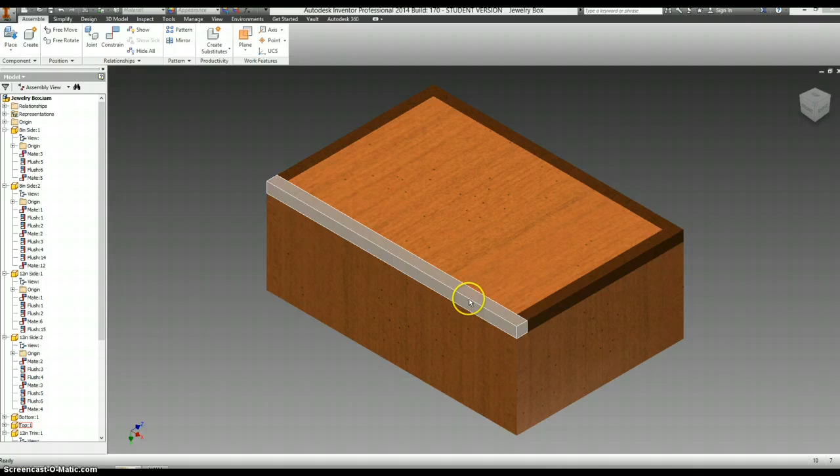So where we last left off, we just made the sides, the bottom, the top, the trim, and we assembled it all together onto your box. Now, with the physical project, this would be the point where we go in and reinforce the sides of this with dowel rods. So on here, we're going to double click one of your sides, and that'll make it so you can edit the piece.

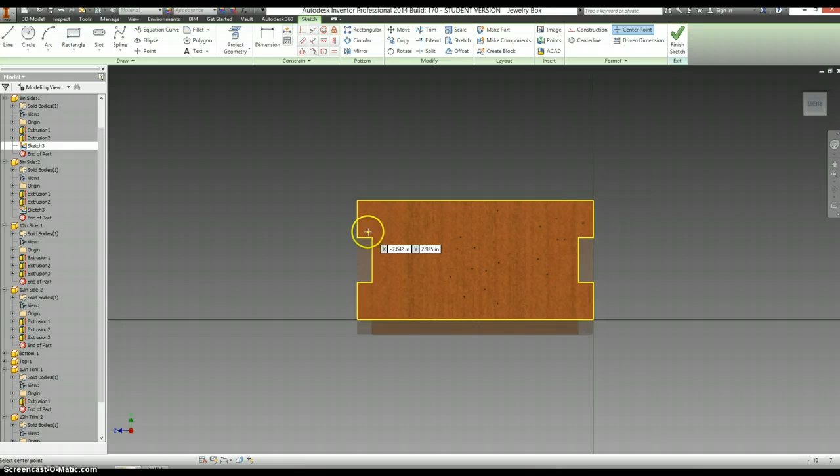And we're going to drill holes into this. So to symbolize that, we're going to right click on this surface and say new sketch. And with our point, we're going to come and find the center of each of these, and it will give you guidelines for when you get close to it.

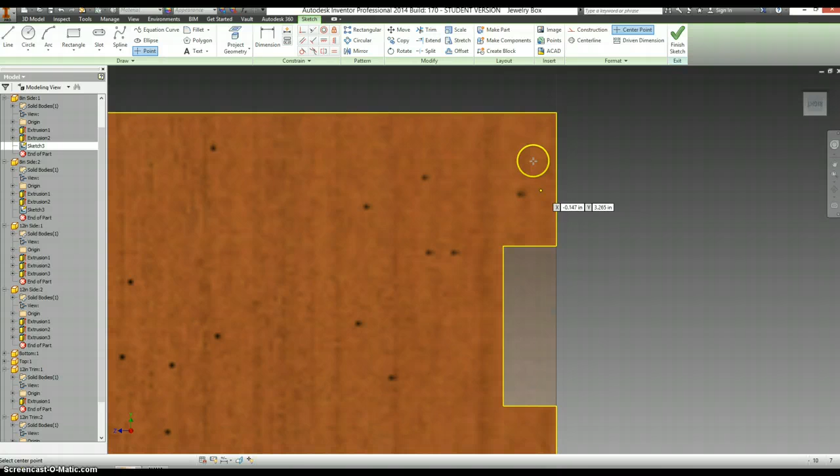And once you have all four centers located, you're going to finish your sketch and select the button that says Hole.

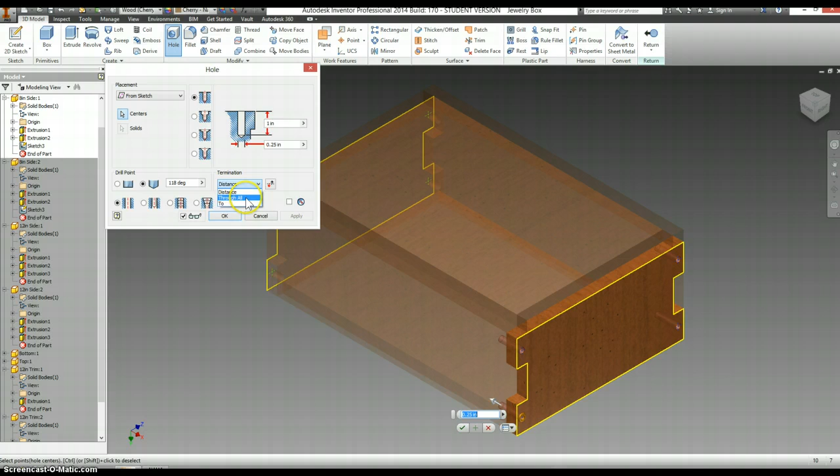Now notice it highlights the ones on the other piece that we're not actually modifying right now. But since these are the same piece, it's the same part file, it's going to change both of them at the same time. We want a 1/4 inch hole, so make sure this is 0.25. We're going to change the termination distance to through all and select OK. And you should have just made 4 holes on these corners.

Now we're also going to take the 12-inch piece, drill a hole through this part, but it's going to go into this one behind it. So instead of switching back and forth, let's go ahead and make the hole that would be here.

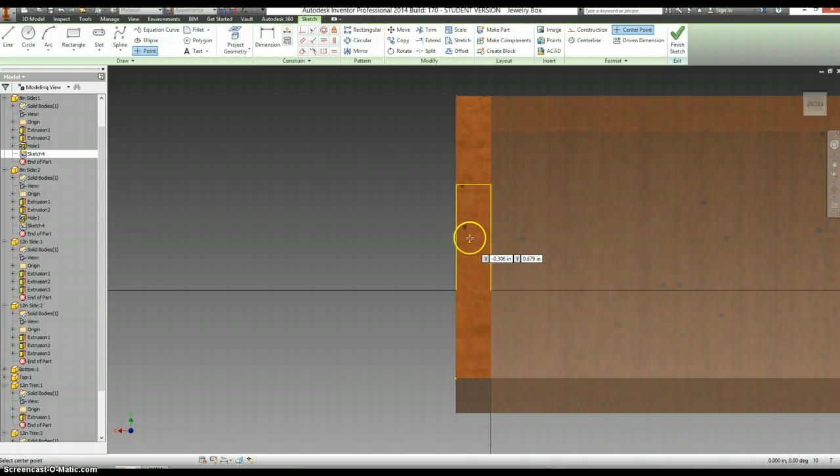So I'm going to right click on face, say new sketch, find the exact center of this again and put in a point. And again, when you start getting close to the center, as long as you have point selected, it should give you little guidelines to say that this is the center of the part. Finish your sketch.

Now we have to click on the point, select hole, and I don't want it to go all the way through. I don't have any drill bits that are that big. I'm telling students that they need to drill down 1 inch into their jewelry box.

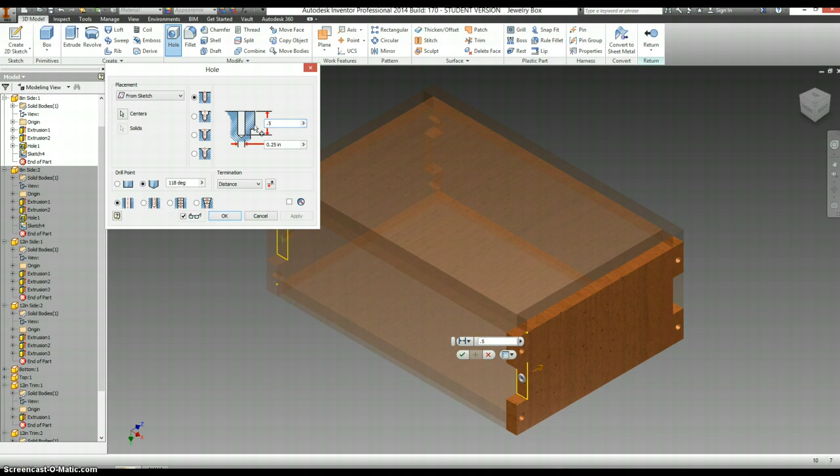So that's a 1/2 inch that goes into the piece that's on top of this, and another 1/2 inch past that. We're going to change this back to distance, leave it at a 1/4 inch, but change the depth to 0.5.

Switch to the other side of your box. Right click on this face and add a new sketch. Click on point again. Find the center.

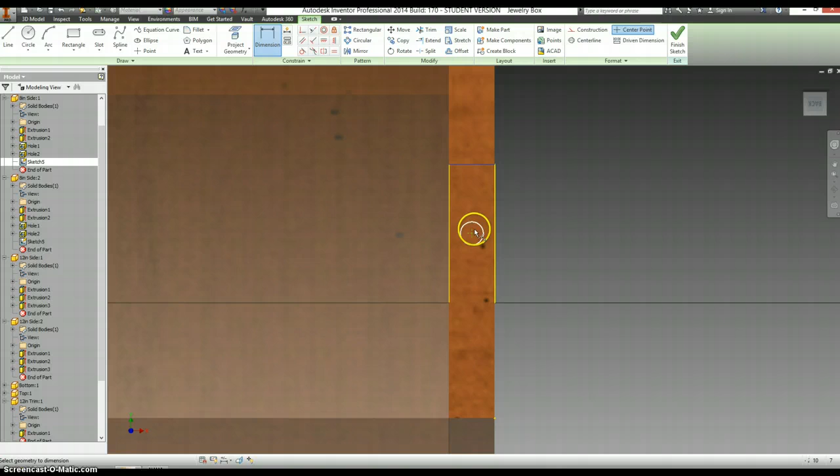If you need to measure to find the center, or if you want to make sure that you're in the right place, click on dimension and click on one of your edges, and on the point it should be 0.75 and 0.25.

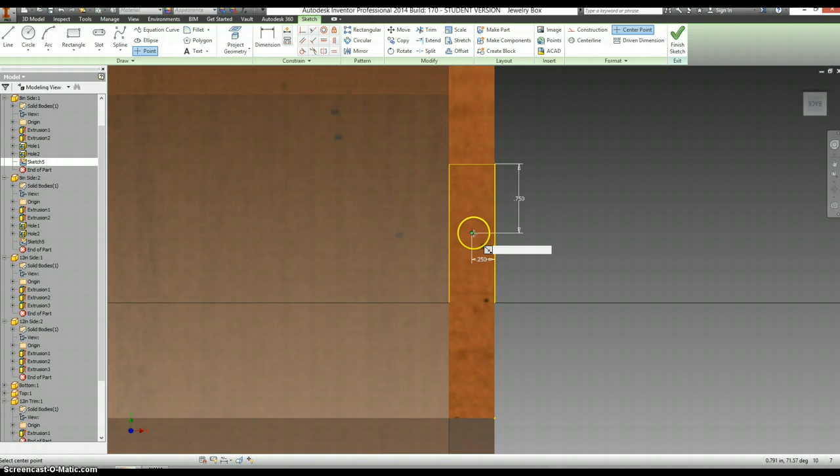This should not be a necessary step if you get the guidelines that line everything up, and it will show you when you're lined up horizontally and vertically with the other midpoints.

Select hole again. It defaults to the only place where you've put a point, and we still want a 1/2 inch deep and a 1/4 inch in diameter.

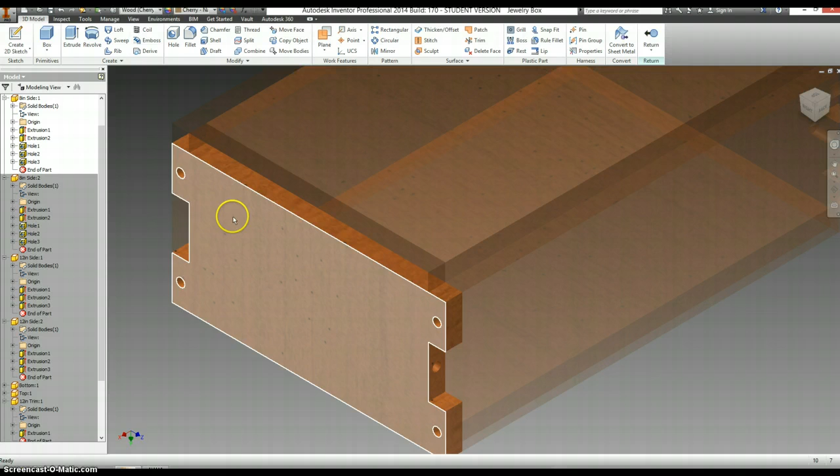Once you select return, it'll show you both sides have the 4 holes in them, and so now we're ready to modify the 12-inch pieces.

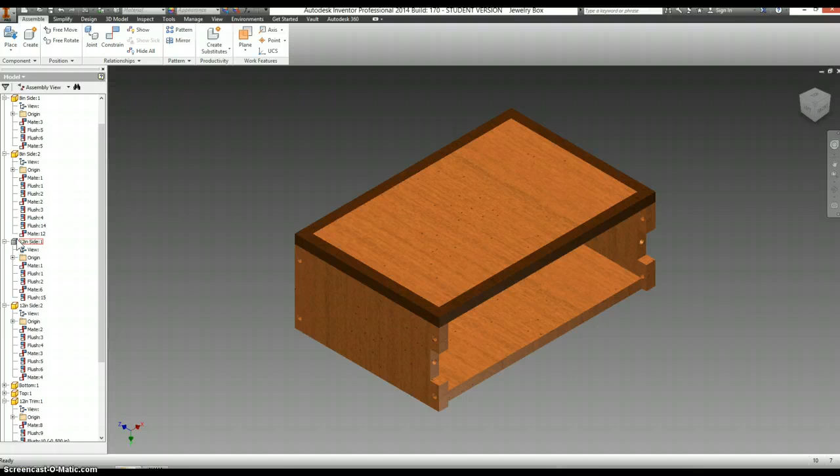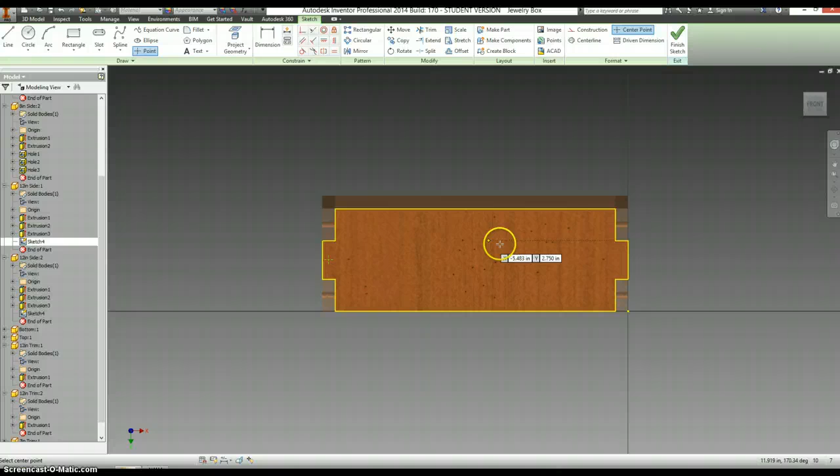Double click on this piece. Click twice. And then right click and make a new sketch. Now select point again, find the midpoint, find the other midpoint.

Finish your sketch, select hole, change the distance to through all, and make sure it's 1/4 of an inch.

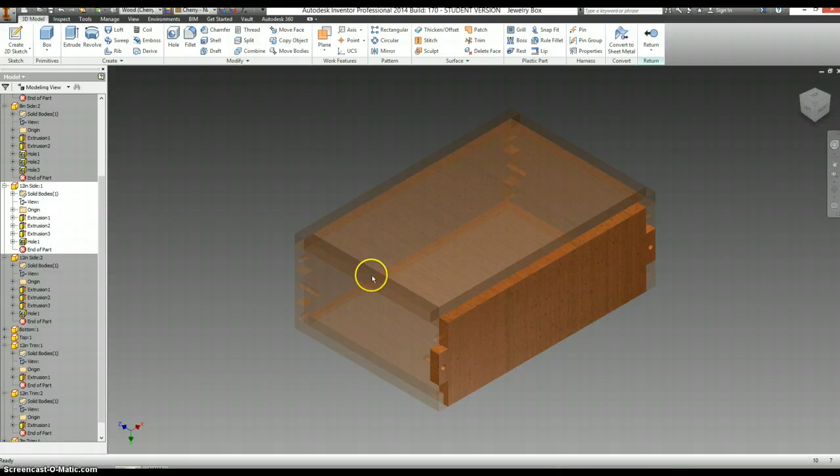Okay, and just like with the other one, we're also going to modify these pieces because we're going to be drilling into this as well.

Select point. Make sure you're in the middle. And with this, it's only showing me the surface I selected. I have to click on Project Geometry and then click on these other edges so I can start to see kind of where things are.

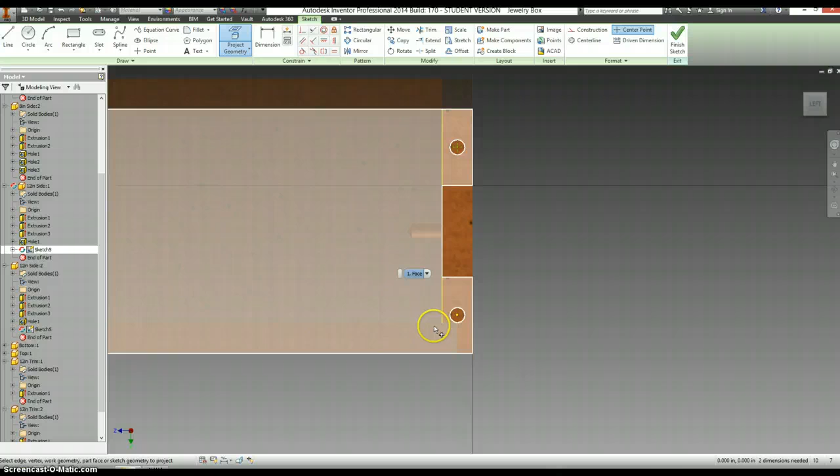And actually I can take advantage of the fact that there's another piece over the top of this and use the hole that was already there to make sure the point that I'm going to put in is going to be right in the middle of that.

Finish your sketch. Select hole. We do not want this to go all the way through, so we're going to make sure we change this to distance, and just like before, it's going to be a 1/2 inch, so 0.5.

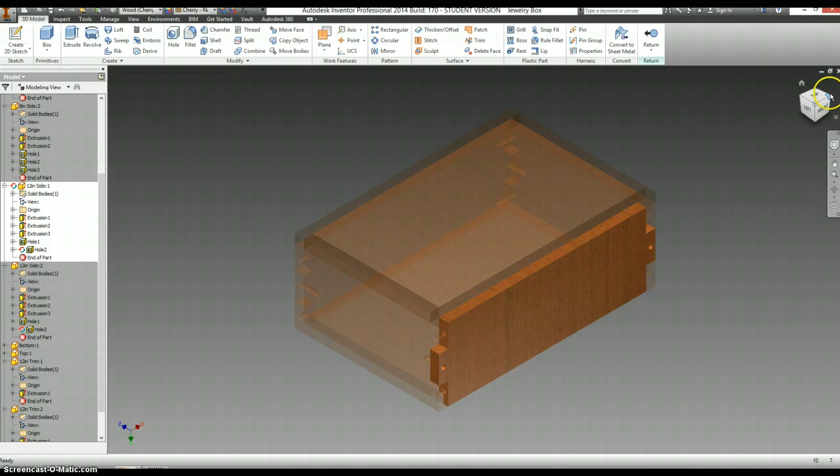Okay, last side. Right click on this surface, say new sketch. That worked out pretty well last time with projecting the holes from this piece. So I'm going to do it with both the top and the bottom. It's going to limit the chances that we can mess this up. Select point. Put a point on each of these. Finish your sketch.

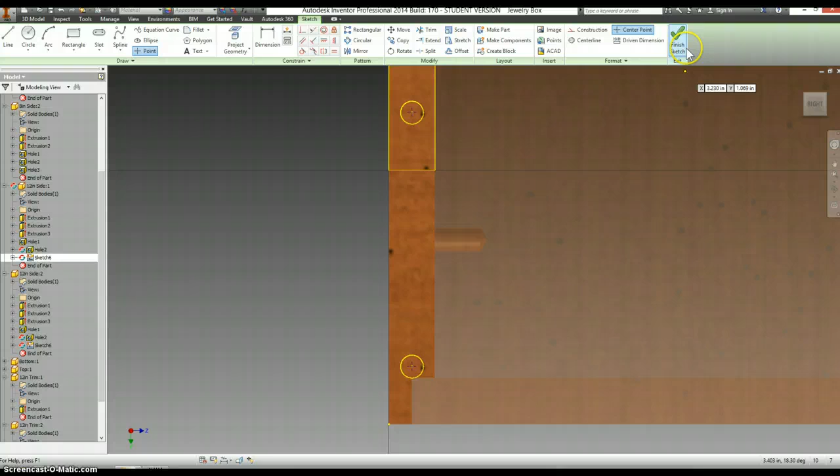Select hole. And now you have a depth of a 1/2 inch, diameter of 0.25. Select OK. And if we look, we have all of these on, even the little ghost part back here, all taken care of. So we should be good to go. Make sure you select return.

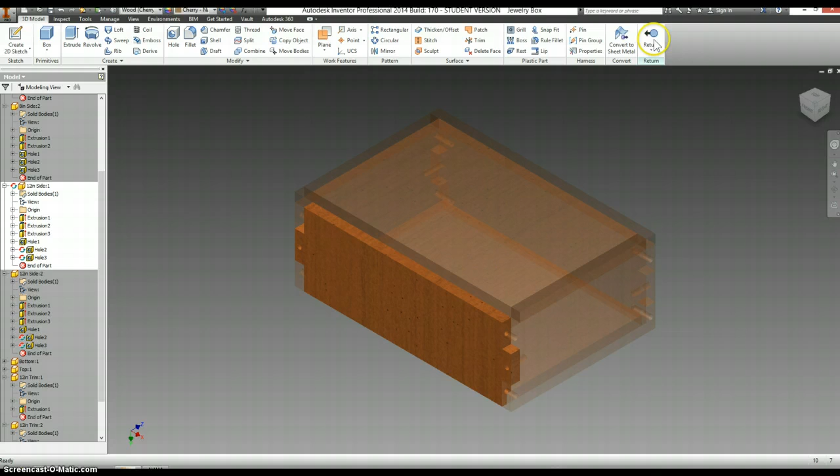And now we're ready to start making the dowel rod. So we have to reinforce these sides now. We drilled out into them. Now we're going to add a physical binder to make sure that this doesn't come apart over time, that the glue doesn't break down and the whole thing falls apart. So to do that, we're going to go up here to new

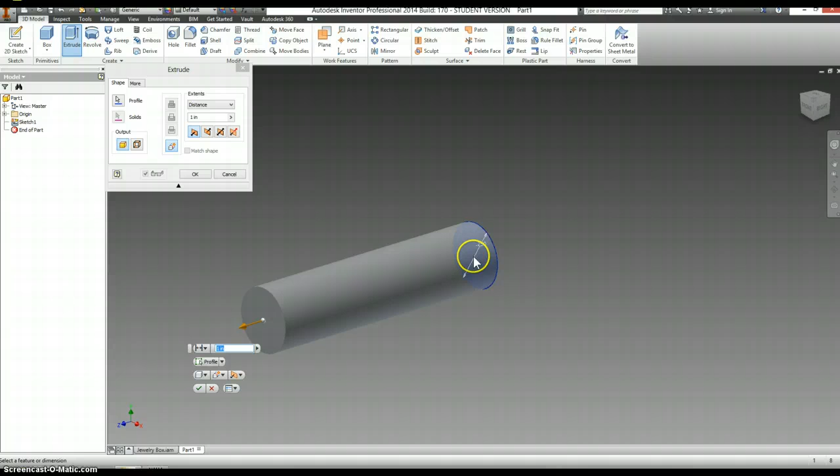part, create a 2D sketch, select one of these faces, circle, select the midpoint here. We said this is 0.25 for the diameter. Finish your sketch and select extrude. And we said these are 1 inch long. And there it is. It's already at 1 inch.

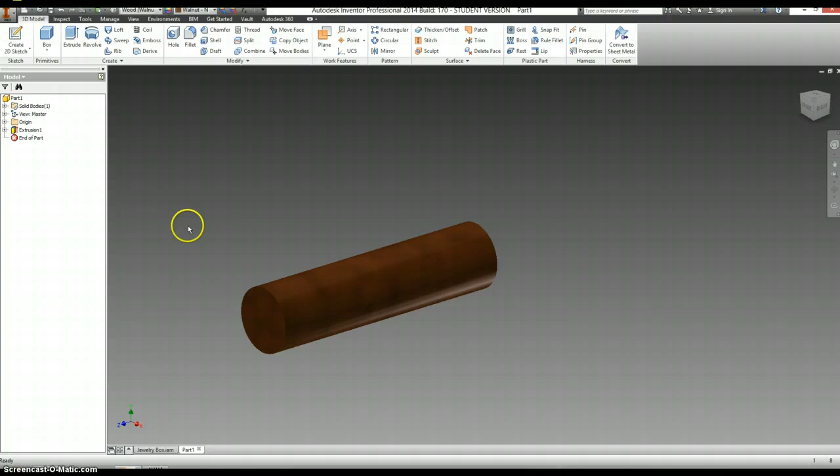And I think it looks kind of neat when you have a different material type for this. So for the different woods that we have, I'm going to select walnut and save this as 1 inch dowel rod. And a dowel rod is just a long piece of wood that's already rounded over like this, so it's cylindrical and it can be cut into different sizes.

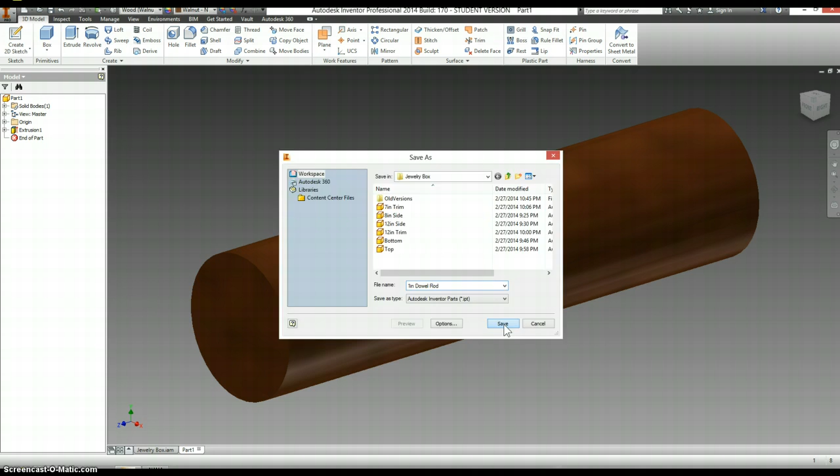Go back to your assembly file, and now at place we're going to put in our 1 inch dowel rods, and we need 12 of these. So here's 1, 2, 3, 4, 5, 6, 7, 8, 9, 10, 11, 12.

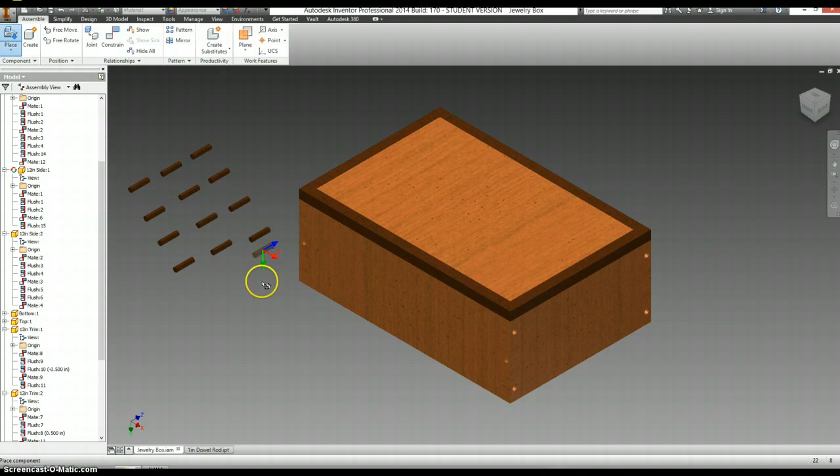Select constrain. We're going to use an insert constraint on all of them, and all we have to do with an insert constraint is we click on what surface we want the two pieces to be touching. So I want this surface of the dowel rod and this surface of the box to share the same point. So I select the two and say apply, and now it doesn't quite look right, so I have to switch back the other direction. Should have given me a preview.

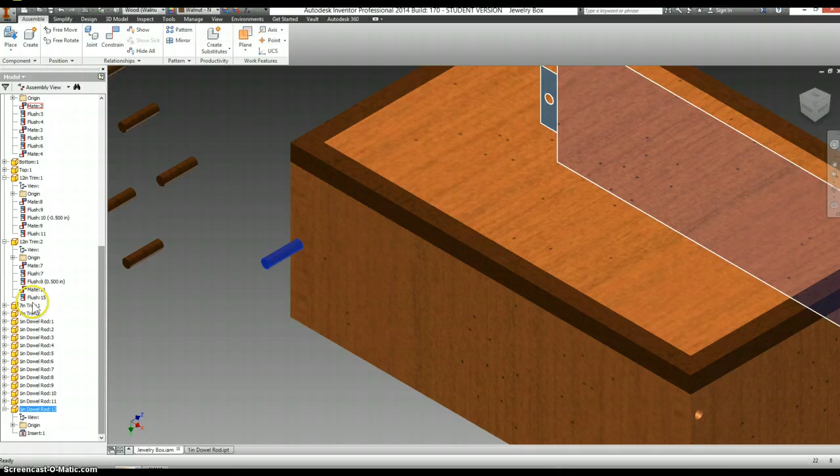Alright, so it messed up. It didn't do what I wanted to do. So I'm going to select the part, find it over here. It's going to be the one that's highlighted in blue. Right click where the constraint is, it says insert, and select edit. Alright, and now it's not going the way that I want it to. I want it to be flipped, and select OK. Alright, now it's doing what I want it to do.

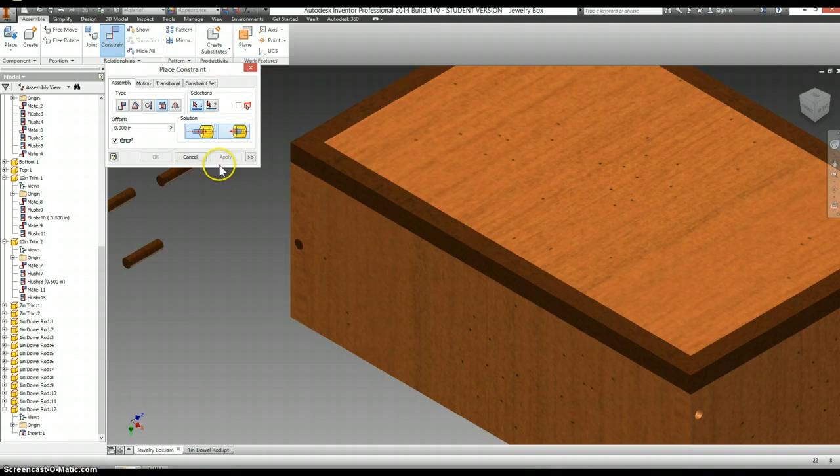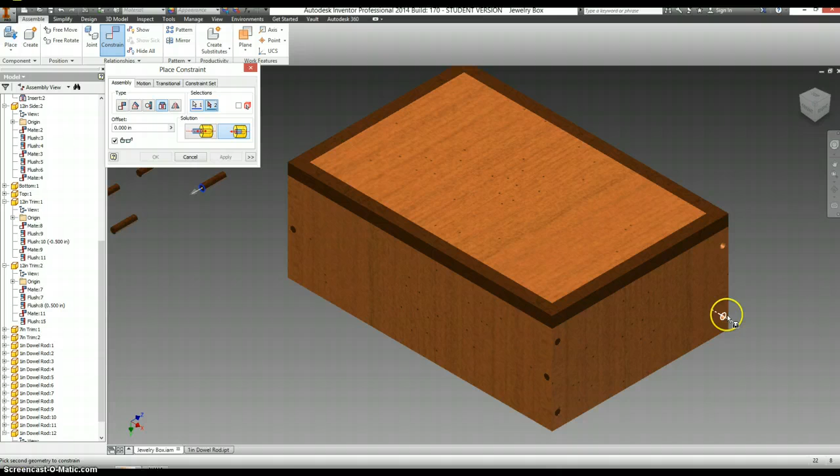We're going to keep doing this same kind of constraint with other areas of the box. And if we just kind of leave this up and select apply each time, it should go pretty fast. I'm selecting the face of the dowel rod and the top of the hole. If you select the bottom of it, it won't do what you want it to do. Just make sure you're on the top face. So you have all of one side, you can flip to the next.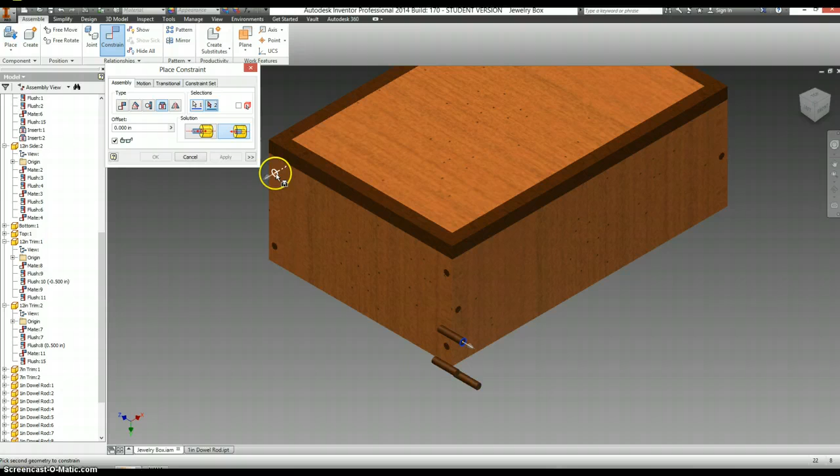And that should be all of your dowel rods. We're getting pretty close to the limits of a video like this, so we're gonna save here, and we'll pick up with a new video next time. We'll talk about how to make the inside tray for this box.